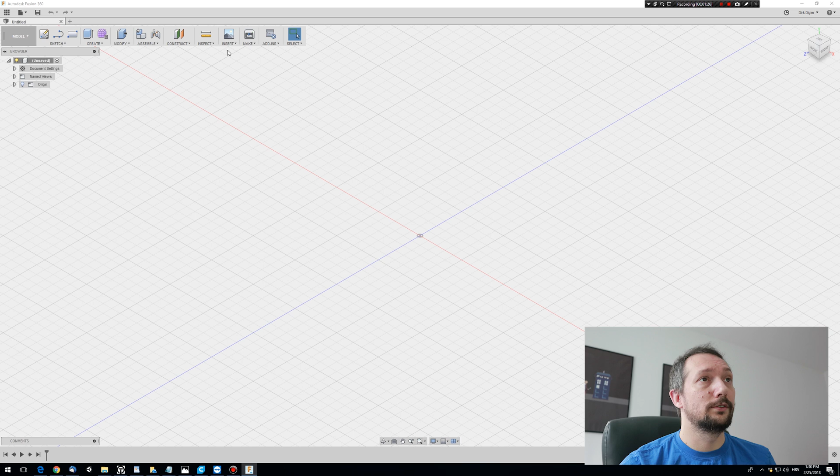I decided to make my own, so I made a sketch and I'm gonna insert it. To do that you need to click on insert and then attach to canvas, and after that you need to pick one of the planes where you want to put your image. I'm gonna click this one and select the image and press OK, and bam, that's it.

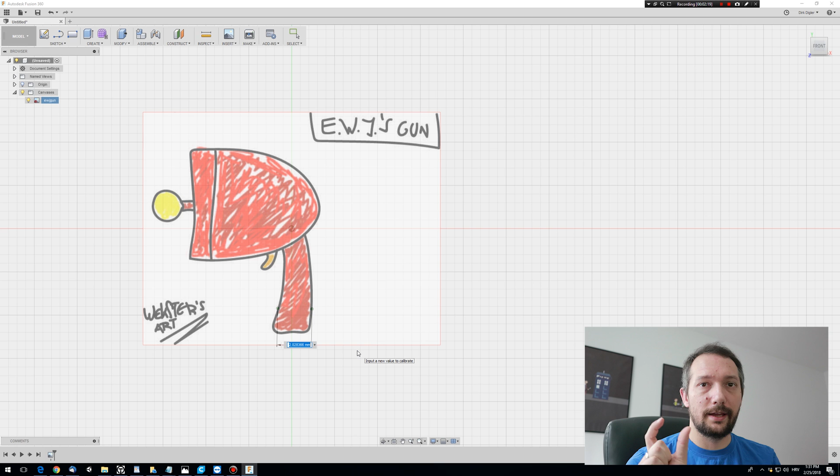Now what we need to do is properly scale it, and to do that I'm gonna right click here and click calibrate. Now I'm gonna pick these two points and I will say that my handle is 45 millimeters wide, and now these things should be scaled accurately.

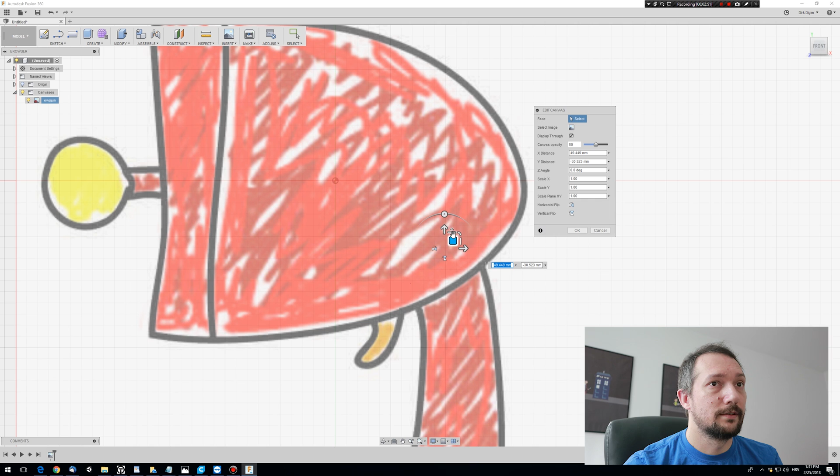Now I'm just gonna put it in the center. To do that I'm gonna right click it and click edit canvas, and then I'm gonna drag it here in the center of this line, and I'm gonna kind of keep it centered here. So this is it, okay.

Now we can start making our own thing, and to do that we need to make a sketch. So we're gonna create a sketch, pick this plane, and then I'm gonna make a line here, here, here, and here.

After that I'm gonna pick spline and click in this corner and drag it all the way to another one, and then I'm gonna just check it here. So now you can see that we have these green handles that we can grab and just pull and do different shapes. So I'm gonna try to match the shape of my ray gun.

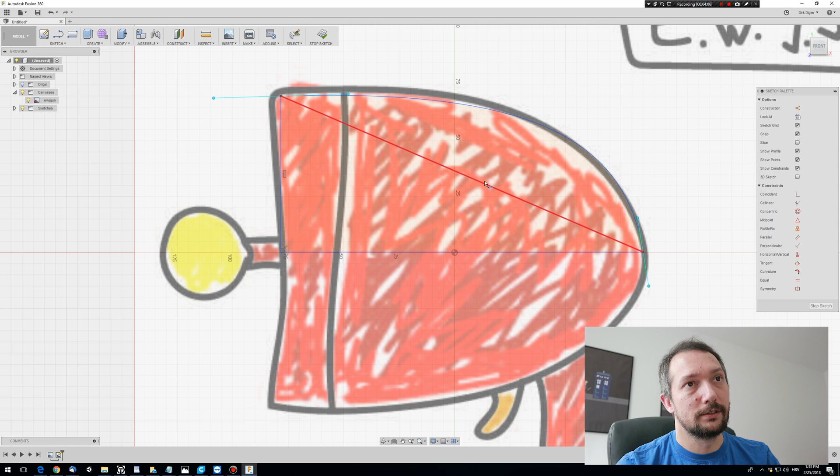Okay, and now what we need to do is delete this line. To do that I'm gonna press T, and you will see that the line is gonna be red. Click on it and it's just gonna disappear. Now I can press inside of my sketch and it's gonna be highlighted blue.

And now what we're gonna do, we're gonna use this profile and rotate it 360 degrees, so it's gonna make an object. If you're confused, just follow along.

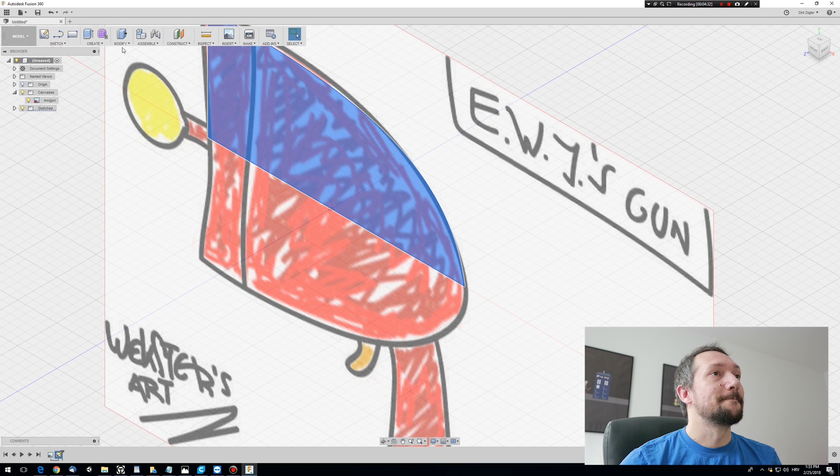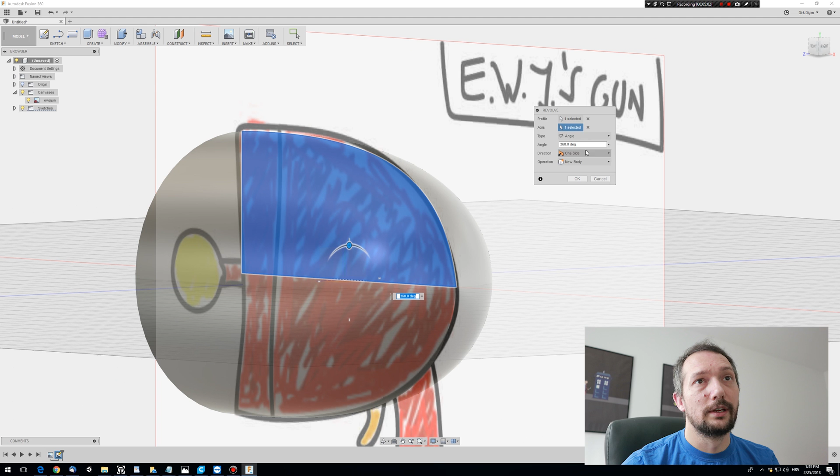So with our object selected, we can go to create and revolve. Actually it doesn't need to be selected, you can select it later, and then we just need to pick the axis where our plane will rotate. In this case I'm gonna pick this one, and bam. So I'm just gonna check, is everything okay? Yes it is. I'm gonna press OK.

And now if I hide this canvas you will see that I have my first part, but you will see that this part kind of has a pointy nose.

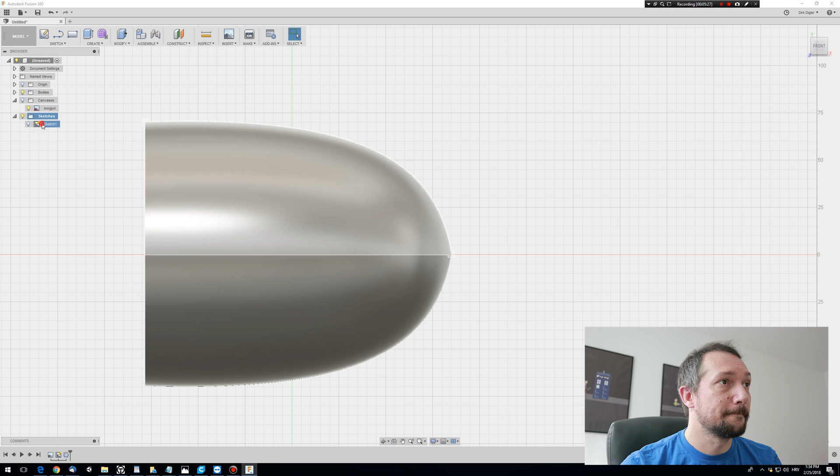So to fix it we can just jump into our sketch. I'm gonna grab this line, grab this dot, and I'm just gonna try to make it more straight. Okay, and stop sketch, and immediately it's gonna update and make adjustment.

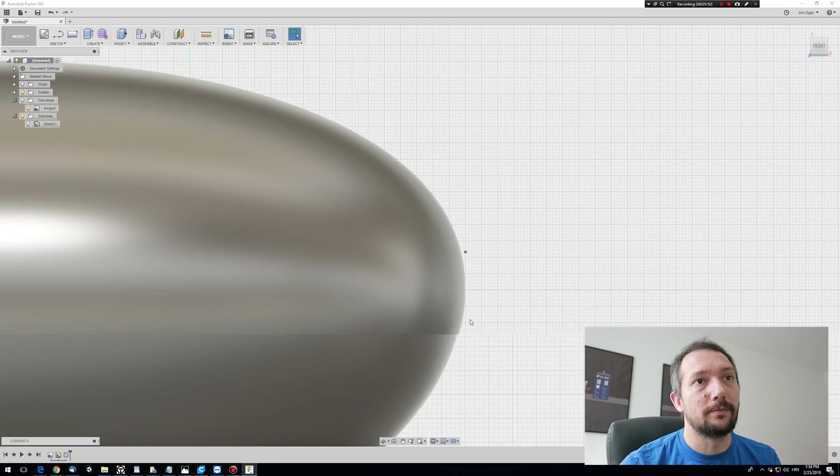Now we can do the handle. To do that, I'm gonna make another sketch and choose this spline tool. We need to click on the plane so we can start our drawing, and then I'm gonna quickly do the basic kind of shape.

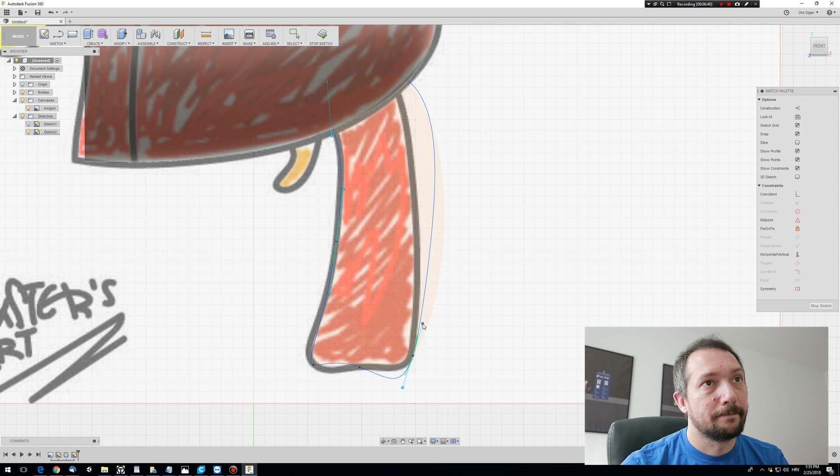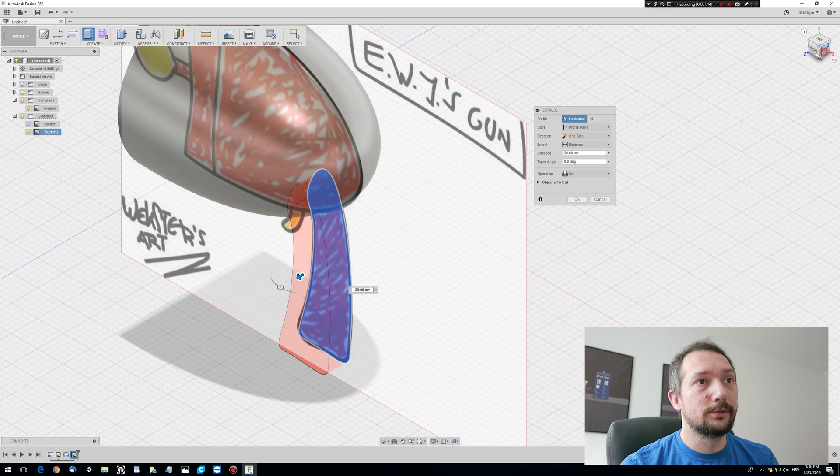So we're gonna stop sketch, select the handle, and this time we're not gonna do revolve. Instead, I'm gonna right click on it and press pull. If I start dragging this arrow, you'll see that I'm extruding this object, but I also need to do that on the other side.

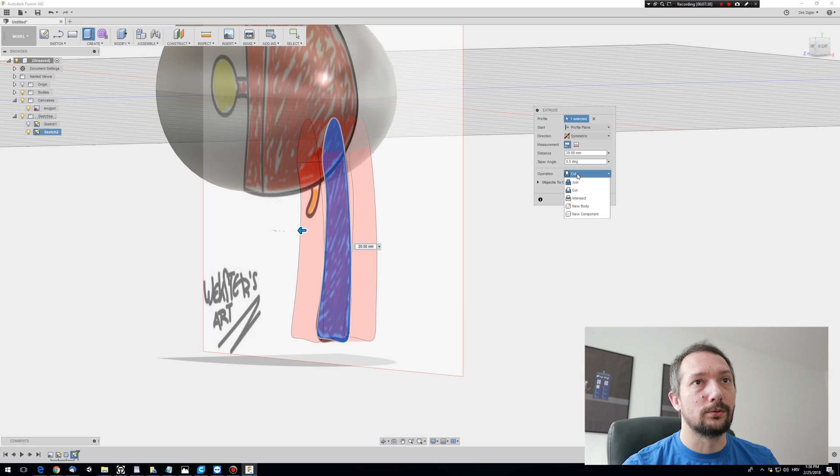So in the options, I'll choose direction symmetric, and you can see whatever I'm doing is immediately applied to the other side. But notice everything is red, meaning our object will act as a tool to cut through this object. To avoid that, we need to click on operation and choose new body. Press OK, and we have our handle.

But for our trigger, I'll show you something else. I'm gonna use line. First, we need to click on our plane, and now I'll make a quick shape around it like that. Then I'll choose this fillet option, and click in the corner. You'll see, as I go toward the corner, this red line appear, meaning it's going to make the curvature there.

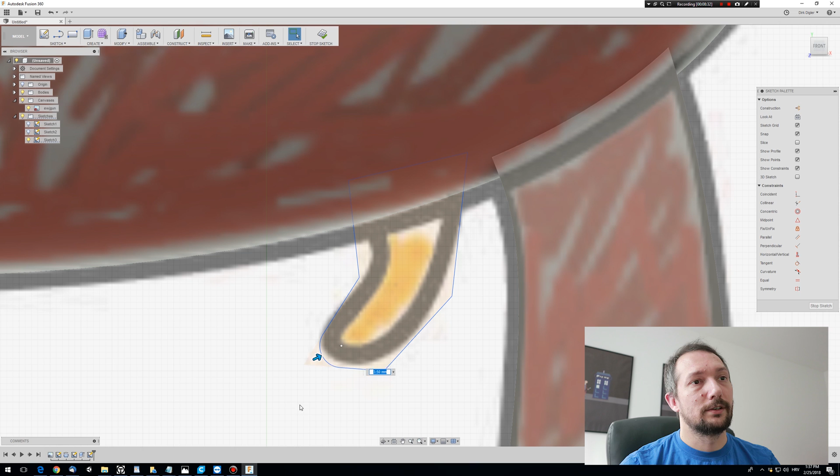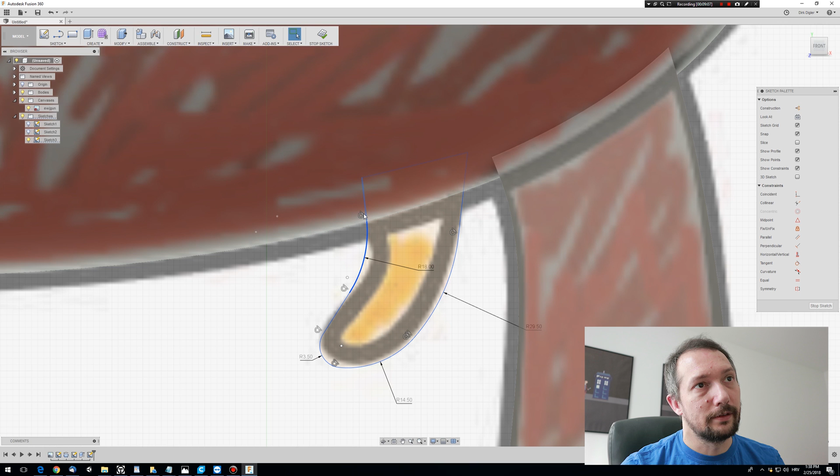I'm gonna press enter, click on another corner, right click and repeat. Now I can adjust that one as well, and I'm gonna do that for the other one, and for this one. Quickly, I'll just click on this line and drag it left and right so I can get an accurate shape. So I'm gonna stop sketch.

I'm gonna repeat the same thing I did with our handle. So symmetric, I'm gonna drag it, paying attention so it's not way too big. And instead of cut, again, I'll click on new body and press OK.

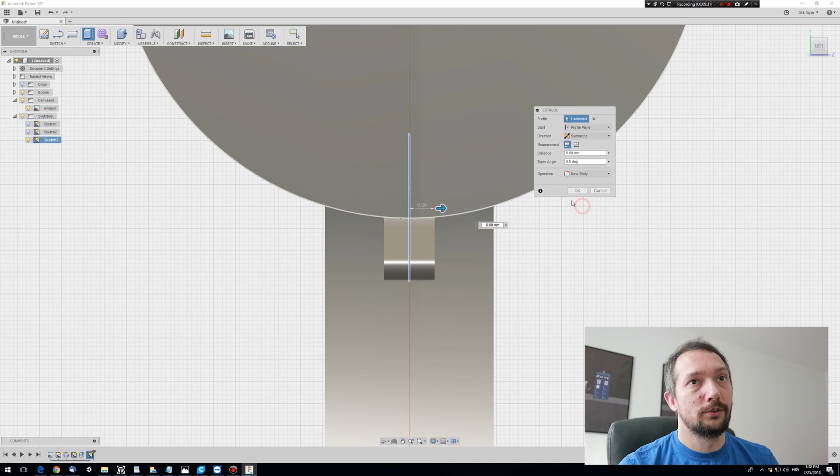If we remove canvas, you can see that we're already getting a nice shape. But to make this even better, what we can do is just select the edges. I'm holding Shift key and clicking on the edge so I can highlight it, and then I'm gonna press F.

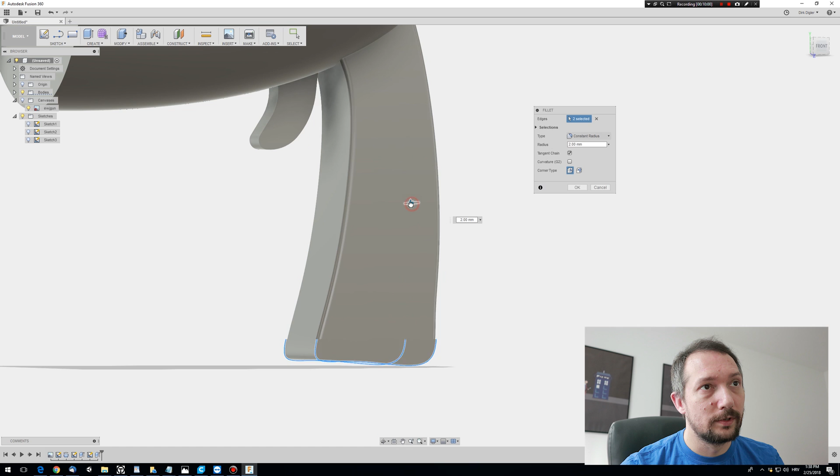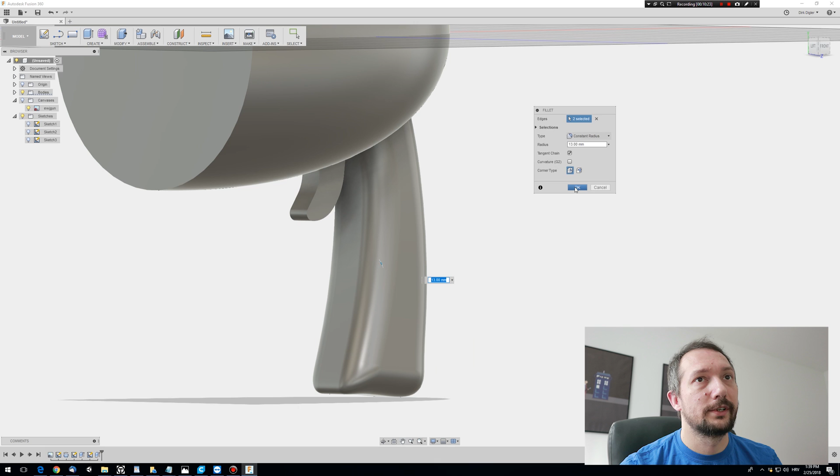And I'm gonna grab this arrow, and you'll see that my object is changing. It's much more smooth on both sides and looks much better. So I'm gonna press OK, and I'm gonna do the same thing for my trigger.

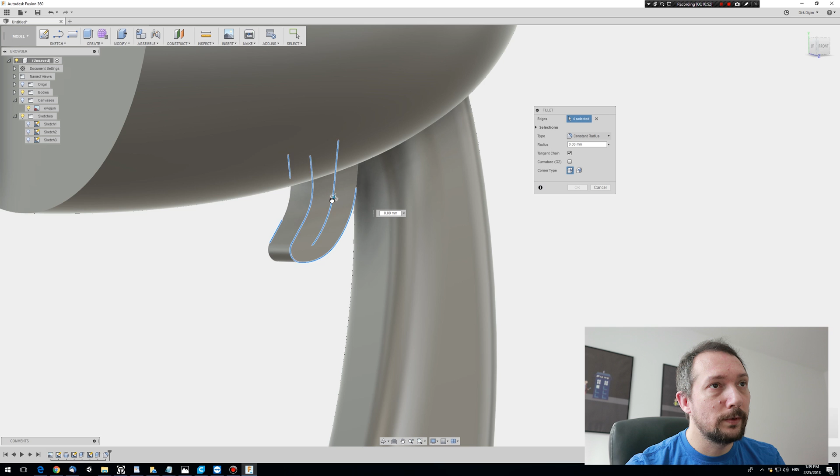I'm gonna select all the edges again, holding the Shift key. I'm gonna press F. If you don't want to use shortcuts, you can just go on modify and pick it here. I'm gonna quickly do the same thing and press OK. You can see that there's a line here, so we're gonna do the same thing.

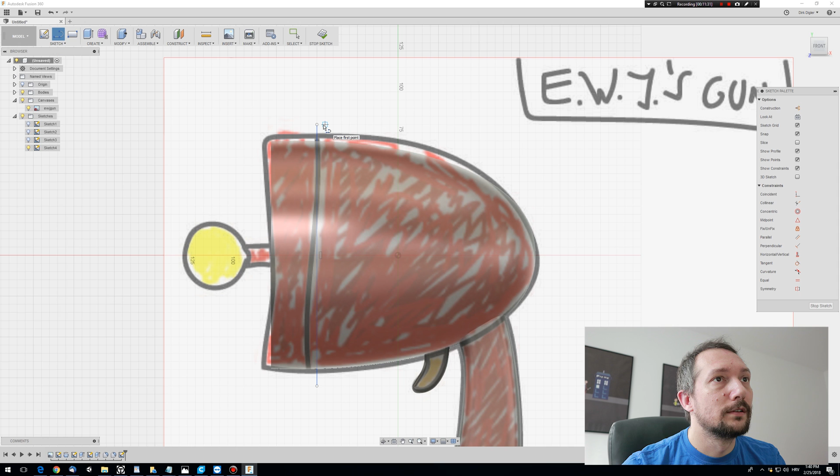I'm gonna make another sketch and use line, cut through, and make a line here, and then another one right next to it. Okay, this looks okay. So now I'm gonna use these two lines to cut through the face of our main body part.

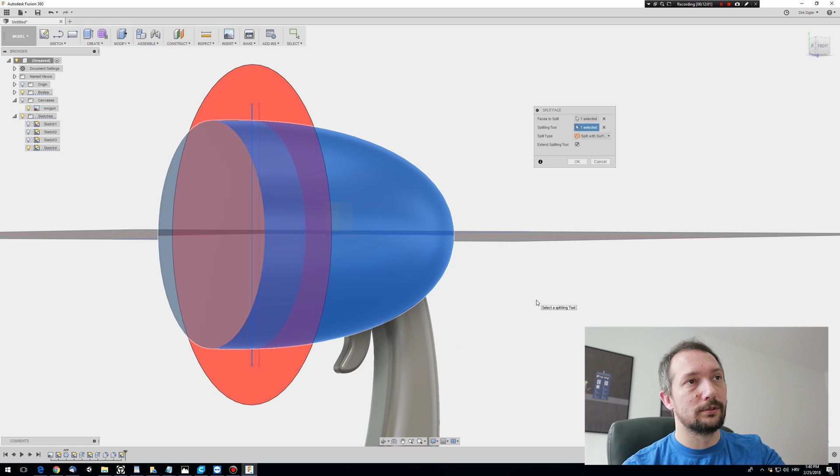To do that, I need to click on modify and split face. Then I'm just gonna select my line, and you can immediately see this red part, meaning it's gonna cut through the whole model, but only through faces. So I'll press OK, select my body part again, and repeat the process. Sometimes the sketch will immediately turn off, so you just need to bring it back. I'm gonna choose this one, press OK, and now you'll see that the faces are divided.

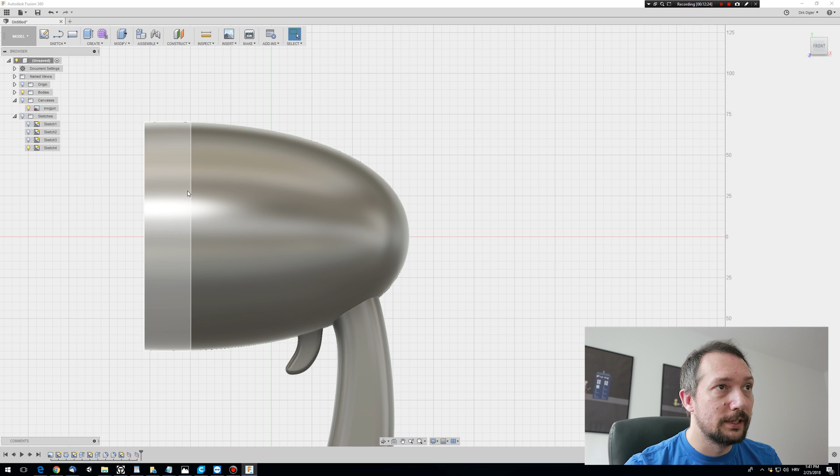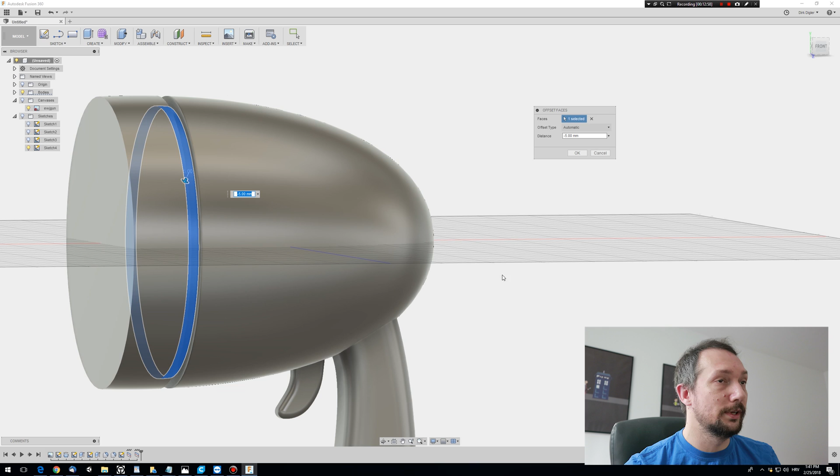I'm gonna click on the inside part, and now I'm just gonna press pull. Again, for that you just need to right click on the object and choose your option. So now I have this arrow thing, and I can decide if I want to pull that part out or inside. In my case it needs to be inside, so I'm just gonna do it like that, press enter.

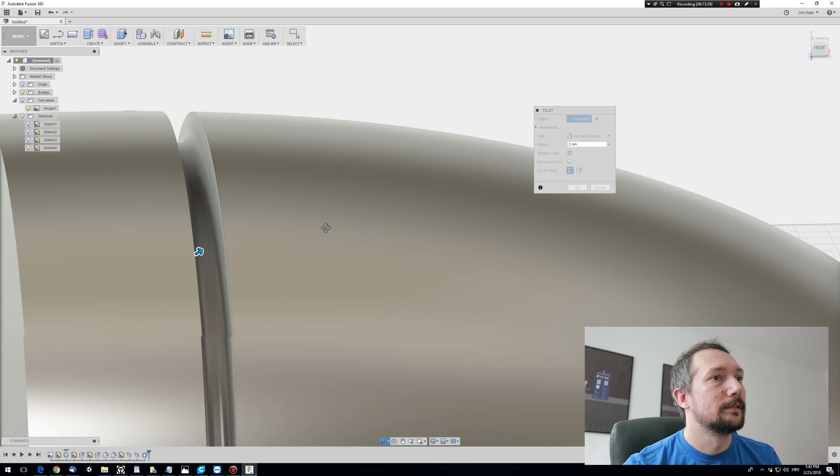Now I want to smooth this part out with the same technique I did with my handle. So I'm gonna select the edges, press F, and easily smooth it out, not too much. So 2.5, okay, and press enter. We're gonna do the same thing for our outside edge. And check it out—it looks so great, look at it.

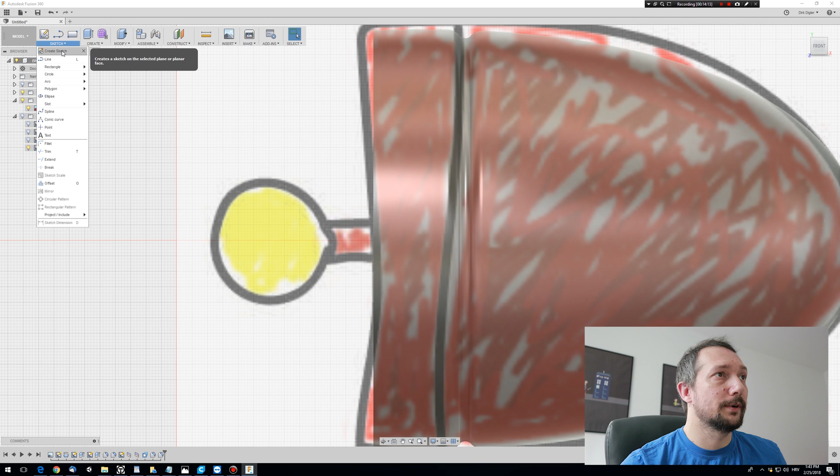Great, now we need to do the barrel part, and that's gonna be pretty easy. We're basically gonna use the same technique we did with our main body part. So another sketch, and now I'm gonna click on this rectangle tool.

I'll find the middle part, and it should be here, and I'm just gonna make something like that. Then I'm gonna pick this circle option—you can do it by pressing C on your keyboard. I'm gonna click in the middle and just drag it like so. And I'm gonna do another line from this point to that point.

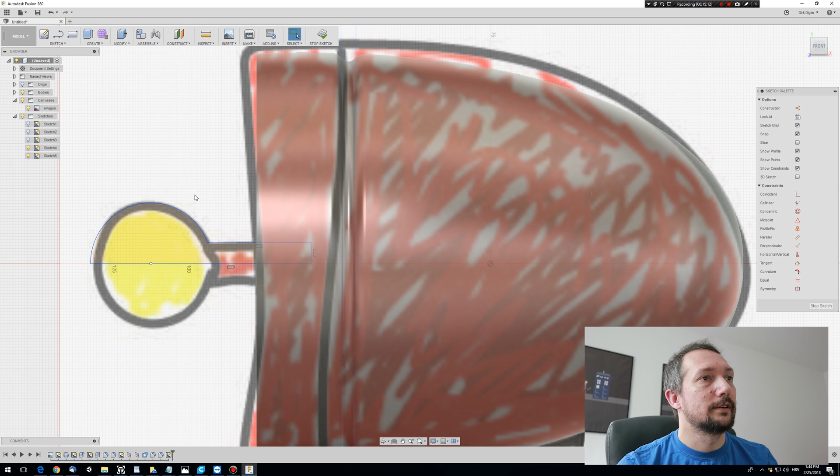Now what we need to do is eliminate a few lines. To do that, I'm gonna press T and just quickly remove them so they're not visible anymore. After that, I'm gonna press escape and select this part. So we're gonna repeat the same thing we did to our main body part.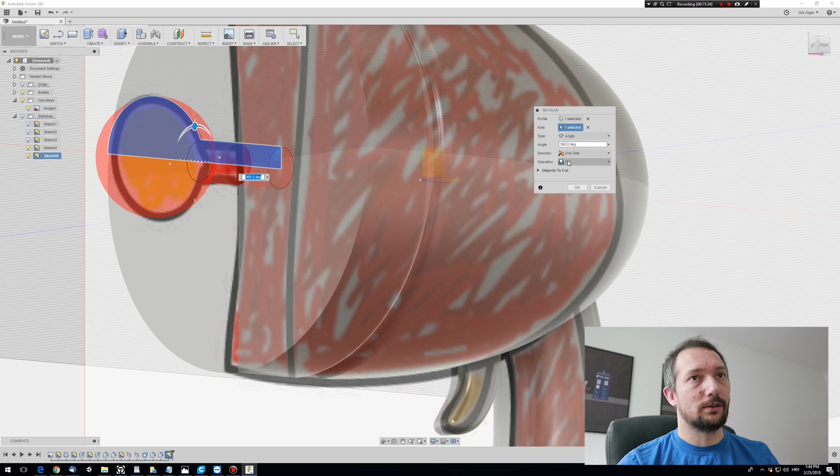Again, create, revolve. We're gonna select the axis, and now you can see that our object is red, meaning this object is gonna cut through this object. So to avoid that, I'm just gonna select new body and press OK. And we are almost done.

We just need this inside part. So if you look here, you'll see that the inside is a little bit, well, inside. We can do that easily—create a sketch.

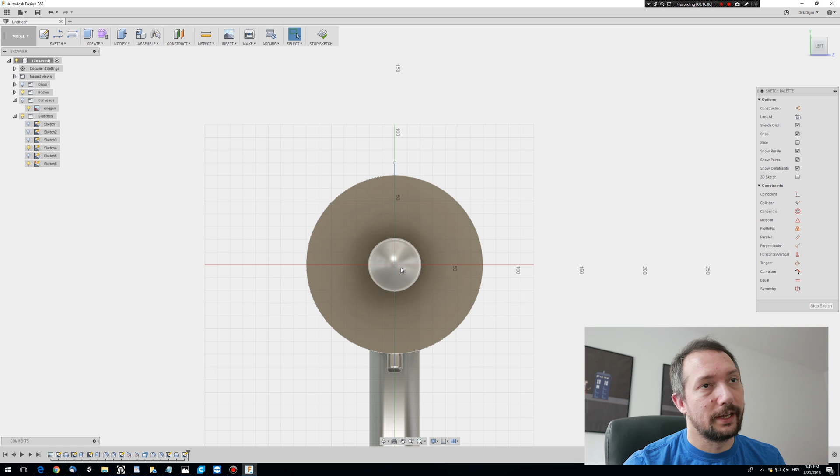I will pick circle. You can press C, click right in the center and start dragging it until I'm satisfied with the shape. So it's gonna be like that.

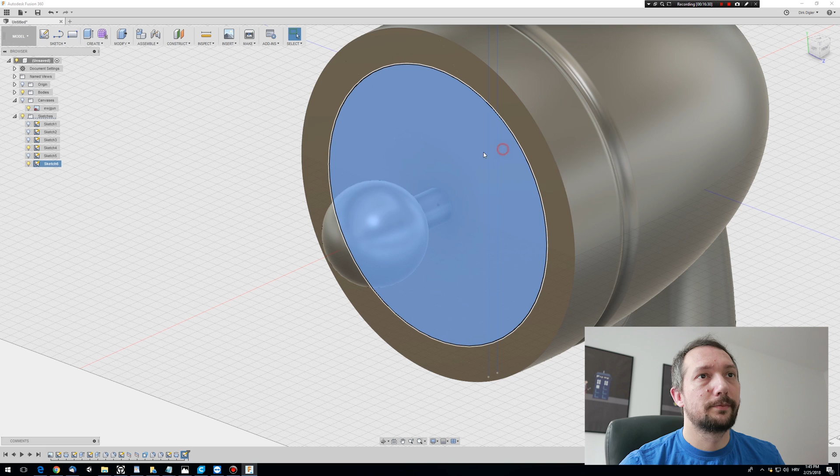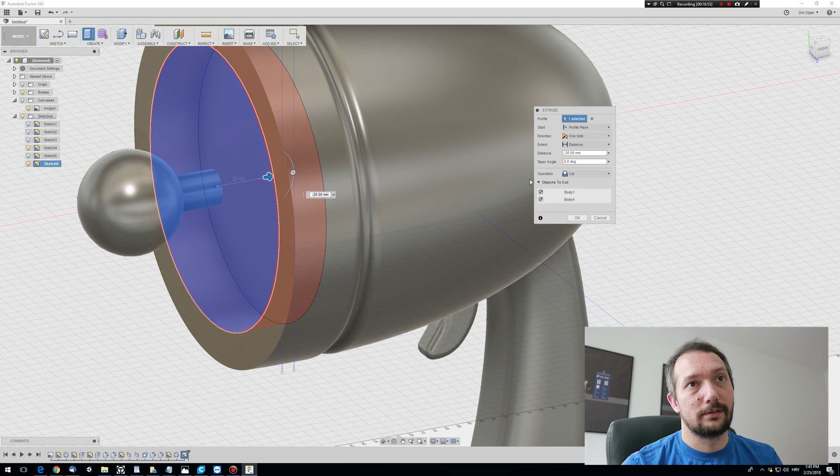Again, I'm gonna select it, right click, press pull. I will go in the opposite direction, and you will see that I'm getting this red option. That's fine, because this time I want to cut through this object, but if I click here, objects to cut, I will see that this shape is trying to cut body 4, and body 4 is this part. To avoid that, I'm just gonna uncheck it and press OK.

And we're gonna fix these edges. When we're here, again F, and make it smooth like that, press enter.

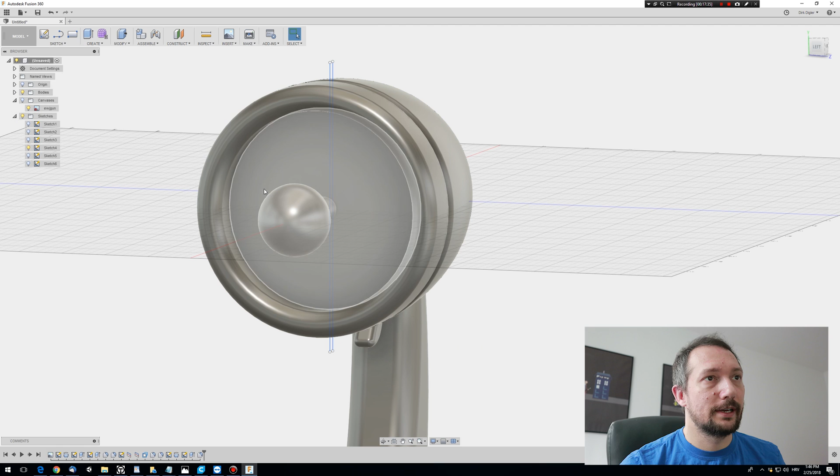Now we only need something inside this part. To do that, we're gonna hide this body part so we can see what we are doing, and we're just gonna select the last sketch. So this is it. And now I'm gonna make a line coming from the center, like that.

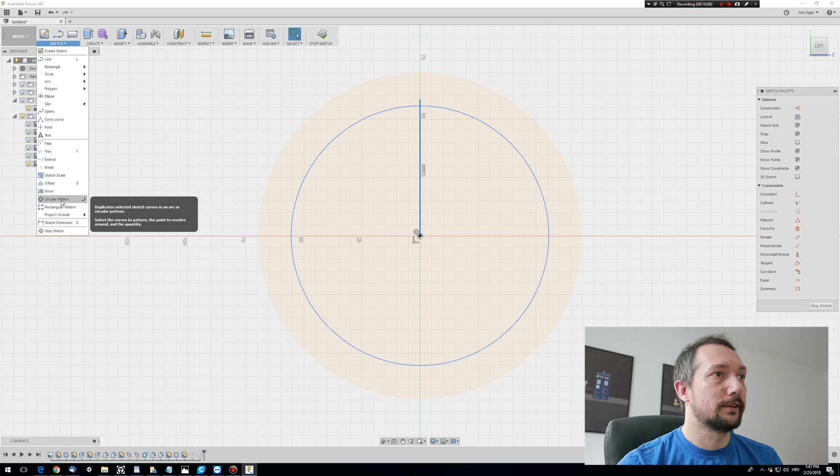Now what we need to do is select this line, go to sketch and circular pattern. After that, I'm gonna choose my center point, which is this one. Now you can see that if I'm adding quantity, we're gonna get this line copied. I actually need around 10, no, 12. Yeah, and I'm gonna press OK.

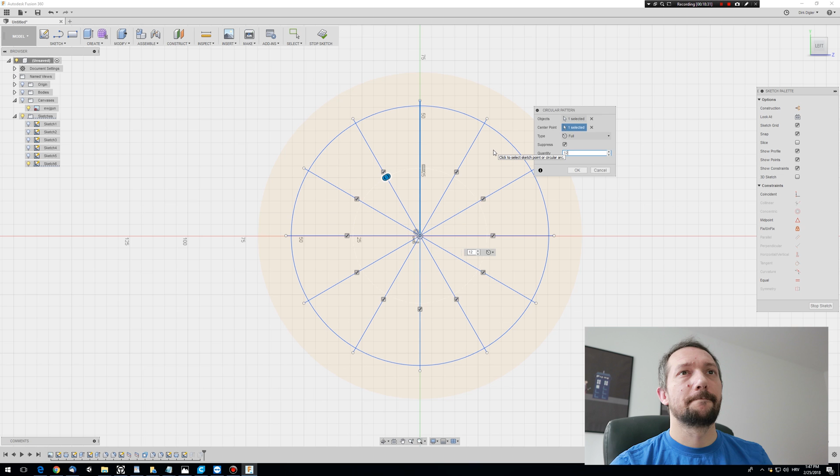And now I'm gonna choose every other part. I'm gonna stop sketch, and press pull. I will just extrude my face instead of cut. I'm just gonna click new body and press OK. Now I'm gonna pull this part inside.

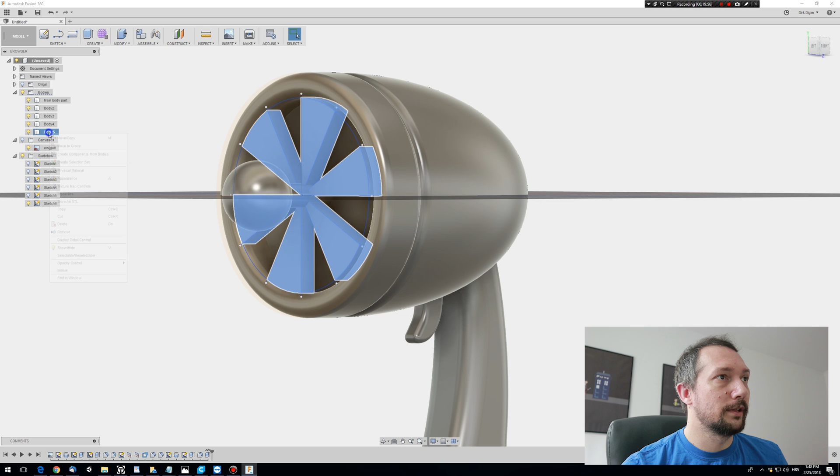Just right click on it, click on move and copy, and now I can move it inside. After I'm satisfied with it, I'm just gonna press OK. And this is basically it.

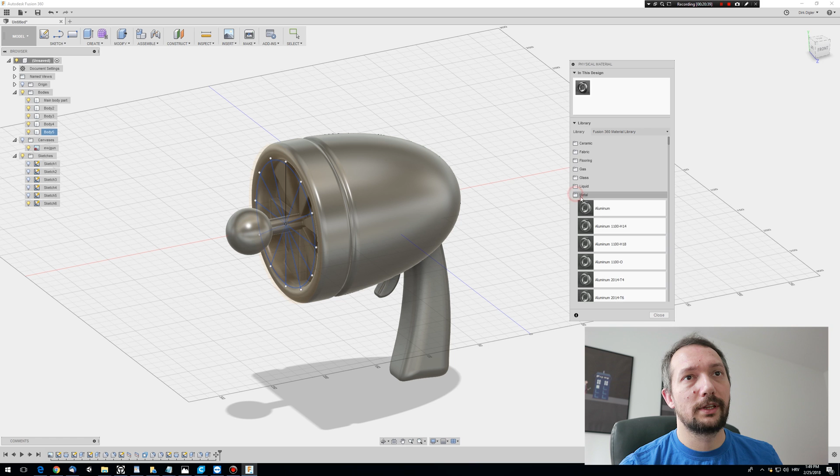Now what we can do is just slap a little bit of paint on it to see how everything looks. To do that, I'm gonna click on modify and physical material. I'm just gonna choose this metal part and I will drag this color onto objects.

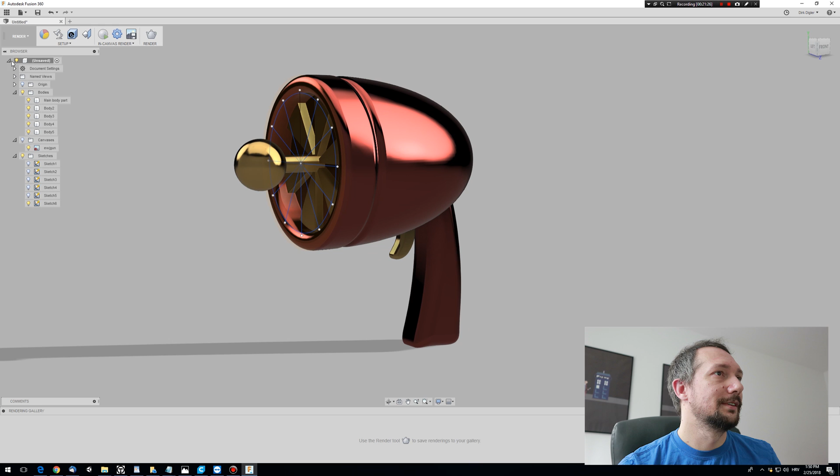Now what we can do, we can just click here on model and go to render, so we can render it and show it to our friends. So we can click on setup, environment library, and basically you'll get 360-degree images that will go around your object, and they will project the reflection and light.

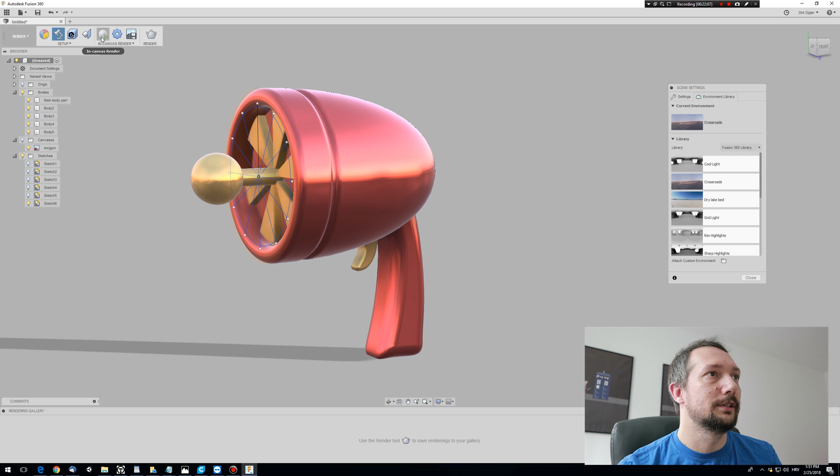So for example, if I pick this dry lake thing, you will see that it's reflecting it on our model. But I like this one, so I'm just gonna choose it, and now you can render it, save it, send it to your friends, to your loved ones, to your enemies, whatever.

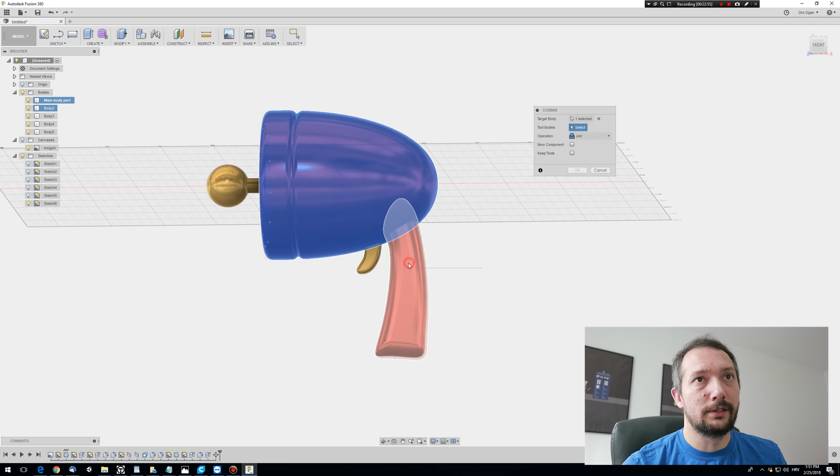For example, I want to combine my body part and my handle, because I need to fix this part. I'm just gonna click on it, click on modify, combine. I'm gonna select the other part, and here I'm just gonna choose join. Press OK, and this is now one part.

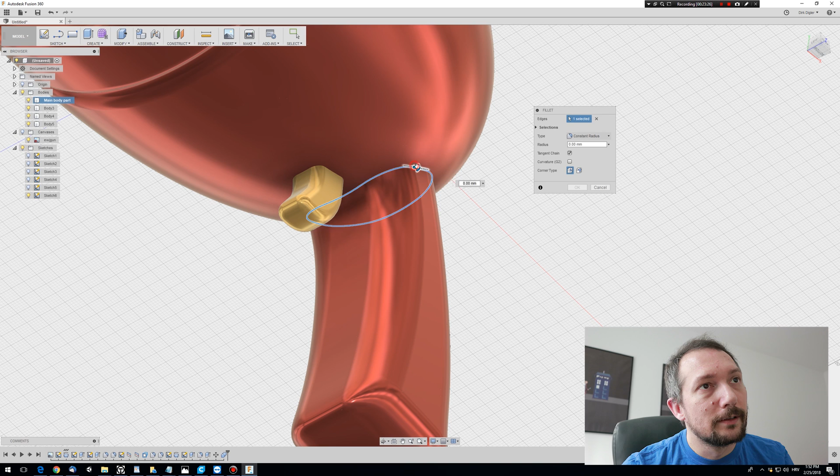Press F. I'm just gonna smooth it a little bit, not too much.

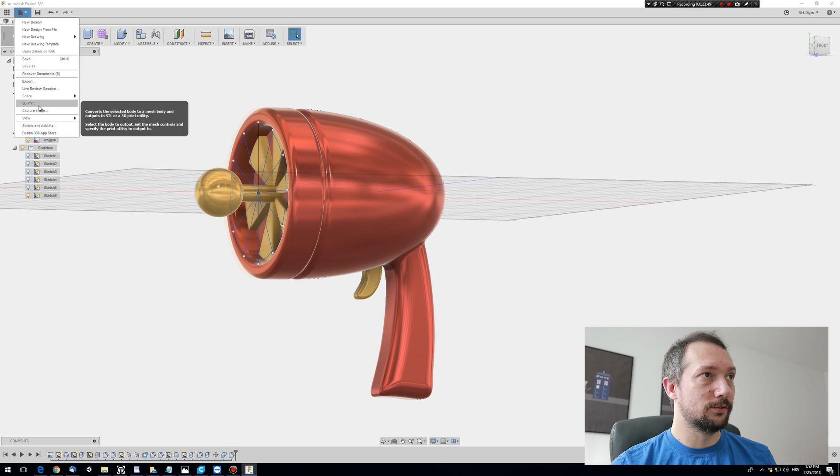Now if I want to send this as one object to my printer, I need to make an STL, and to do that I'm just gonna click on bodies right here, file, and 3D print. Now this option will send me directly to 3D print utility if I want, but usually I'm just unchecking that and pressing OK.

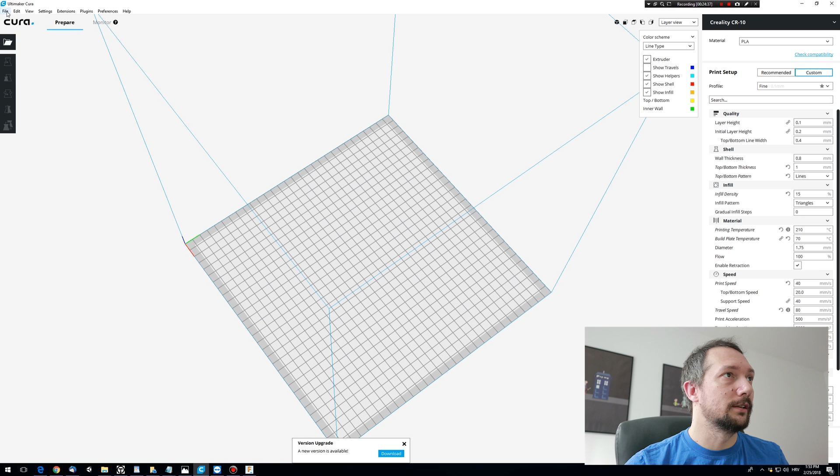So now I can make my own Earthworm Jim hold gun STL, and now I can bring it into Cura or any other slicing software that you're using, and that's it.

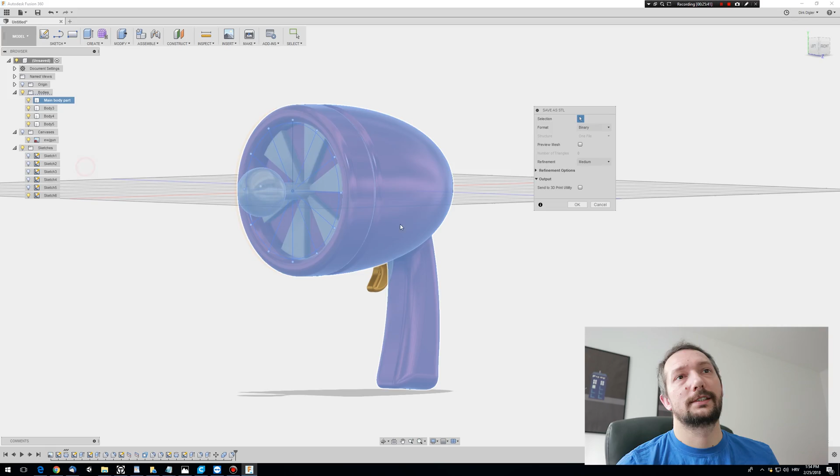So to print objects separately, you can just click on object that you want to print, right click on it, save as STL. Fusion is really powerful software and you can really do a lot of stuff with it. I just made a quick example to show you what kind of cool stuff you can make with very little knowledge.

So this should be an accurate model. I mean, if you grab an Earthworm and put it in some kind of suit, I think he could hold it. And that's it for today.